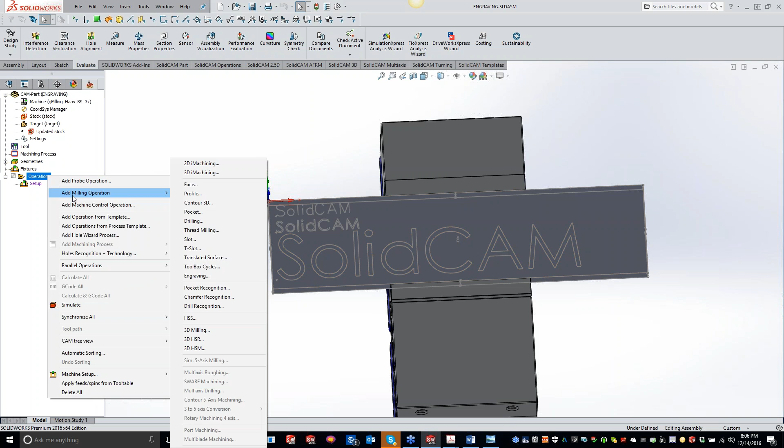We'll go to our engraving right here. Now, set up just like all of our other operations, starting with your geometry and just moving your way down.

Now, with engraving, you do have the option to do 2D and 3D. When we get into 3D, there's a lot of nice features that you guys don't have to do in SolidWorks that SolidCAM really makes easy. We'll cover that in the next part here.

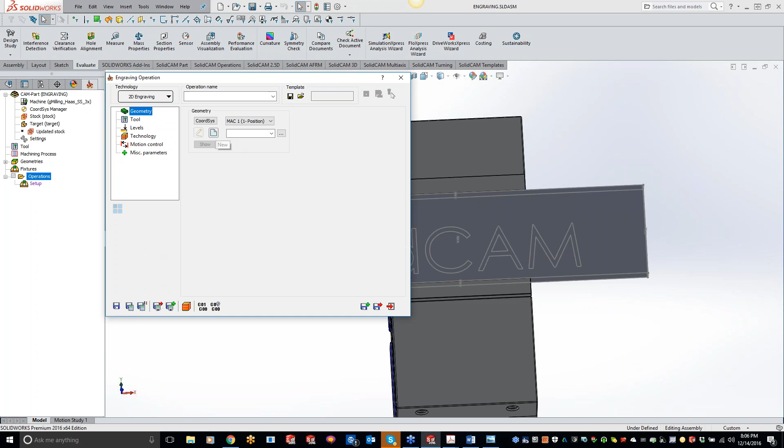So for 2D engraving, just go ahead and grab that new geometry. Now, if you guys are looking for a really nice single line font, SolidWorks has it — it's called DPS Schrift. For those of you just looking for a simple single line font like what we have up here, DPS Schrift is the font you want to go with. We can do the bold too, and I'll show that, but if you're just doing simple part numbers, you don't need to bold it or do anything fancy. That's the one you're going to want to use.

So when we go to pick our geometry, we're used to coming over here and chaining. Well, since we created all this in SolidWorks, we can just come down to your multi-chain at the bottom, click Add, click on the text icon on the left-hand side, and hover over. Right now I have a mouse cursor that looks normal. As soon as I get close to that text, see how it turns to a letter A? As soon as it gets there, just click anywhere, and it will automatically find all the chains for that font. So we can accept that, and what it's going to do is build chains.

Now, let me minimize this out of the way here. If you guys are getting chains that are a bunch of little tiny chain segments, what's happened is your spline approximation is off. So I would set your spline approximation to around 2/10, do a gap minimum of 2 thou and a gap maximum of — you don't even need 40, you can have 10 thou on there. But if that spline approximation is off, you get a bunch of little itty-bitty line segments and 500 little chains. We want one chain throughout the entire letter so it's not doing a bunch of little breakups. Just a little tip for you guys.

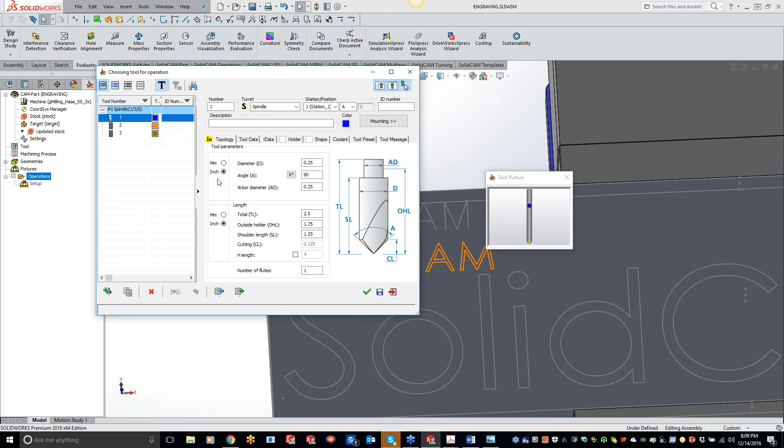Okay, so we got our geometry, we are going to grab our tool. Now you guys can use whatever tool you want — I personally like just using spot drills. Get a carbide spot drill, it'll last forever, but they do have engraving tools out there too. Costs a little bit more, but it all depends on how much engraving you're doing. For this one, I'm just going to grab a regular 1/4 inch spot drill. Let me add a holder on here.

Okay, now levels — upper level is the upper part of your part. If you guys are seeing this as mine is red and yours is green, it's just how the colors are set up in your SolidCAM settings. So if you're seeing green or red, it doesn't matter what color it is, it still means it's physically linked itself to the geometry. Now the engraving depth, we'll set this one at 10 thou.

Now technology. Like I said before in all the other night classes we do, technology is kind of where all the guts of everything are, everything that's going on.

Now when you guys are doing a single line font using your spot drill or your engraving tool, you always want to change this to center. You can have this defaulted as center if you want, but we have to save that out as a template, kind of what I was talking about in the video on how to set up a default setting in an operation. So go ahead and put that to center, and we're basically done.

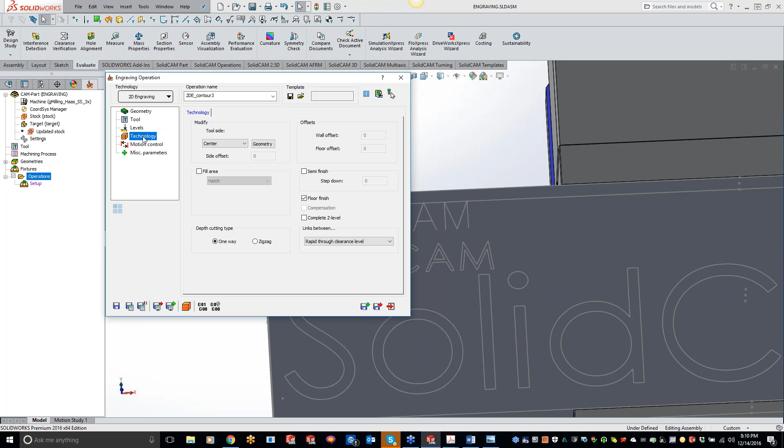You can go to your motion control and miscellaneous parameters, but 99% of the time you guys aren't going to get past the technology. So we'll just leave it on center, save and calculate, and now we have our toolpath.

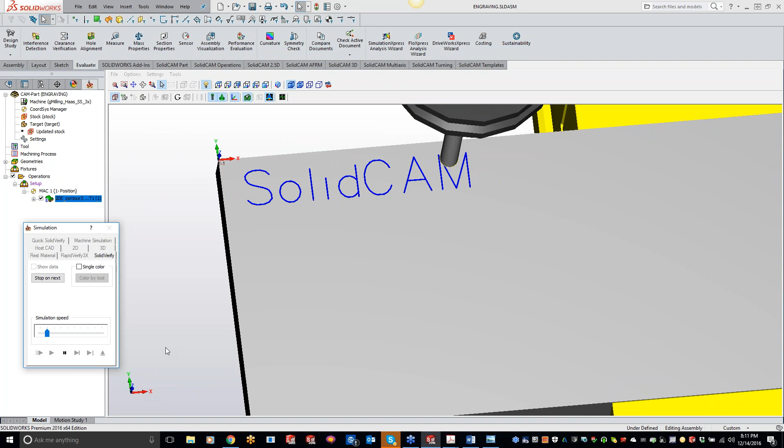So let's just do a SolidVerify, and you can kind of see what's going on here. Let me slow it down for you guys.

Just running through, cutting down 10 thou, and just following the center of that geometry. Real simple, easy to use, and this is called the DPS Schrift, and that's the best single line font I have found out there. I did some experimenting last night and tried to download some single line fonts with no luck at all.

So if you guys are not seeing DPS Schrift, let me do a sketch real quick here for you. Under your font right here, I have noticed that Windows with their updates have sometimes removed that. So if you guys do not have your DPS Schrift, let me know and I will email you that file.

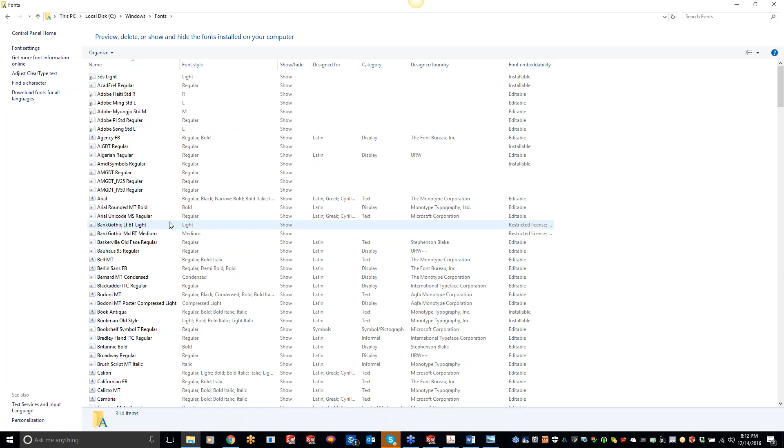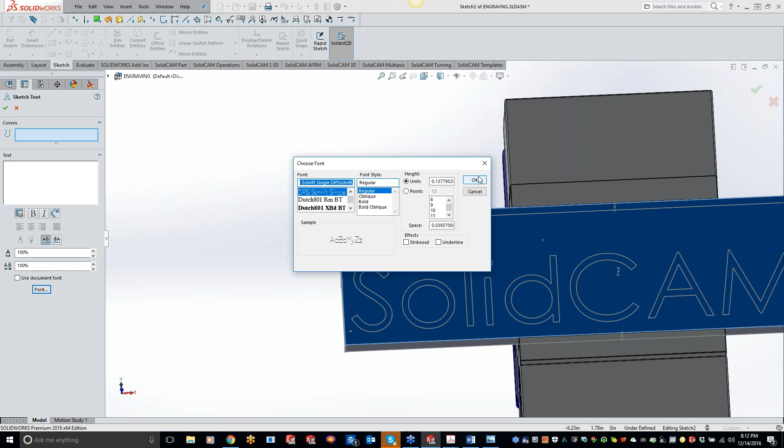Hey Kevin, can I ask you a quick question here? Absolutely. I remember, and I might be showing my age here, but back years ago when you wanted to use specific fonts for engraving, you had to go through this weird process where you had to explode the text and turn it into geometry. There were a few different steps you had to go through. You don't have to do that anymore, nope. All done automatically for you. Excellent. Okay, so you have to understand, I mean you're talking to a 40-something-year-old guy here, so just... For those of you that haven't seen us at IMTS, Brendan might be 40-some years old, but he looks like he's 25.

Okay, so now we'll get on to the bold. So I'll leave that in there. We'll just start a new add milling, engraving here, and we'll do another 2D.

Now basically we're going to pick our text the same way as we always do. Multi-chain add, click on text, and it's going to chain everything for us. Hit the green checkbox, and it's going to build all our chains for us.

And we can go ahead and grab our spot drill here. Same thing with our levels, we'll just go another 10 thou. Technology, put it on center. Save and calculate.

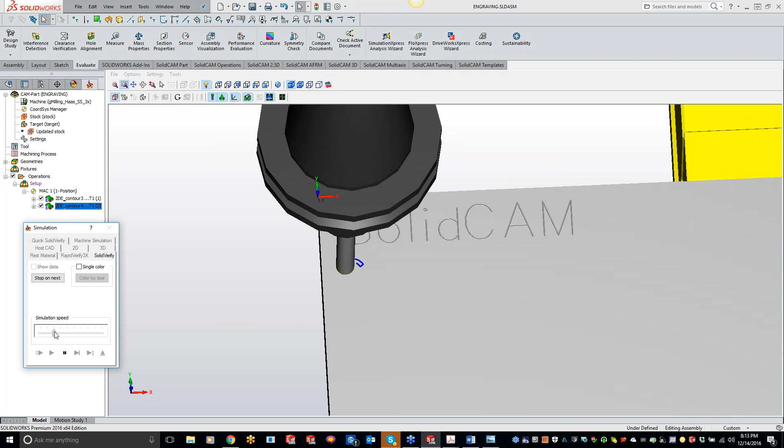And let me get zoomed in here. Play that through, and now you'll get the bold style of font, and this will work.

The SolidCAM engraving will work with the majority of SolidWorks fonts. If you get into the really crazy fonts that have letters kind of looping back on themselves, that does become a problem just because it's multiple chains there. You can go back, it will chain everything, but you might get a portion that's not chained, and you'll just have to go back and click on those.

And I'll actually show you that when we do the 4-axis engraving. So any questions on what I've shown you just on the simple single line font?

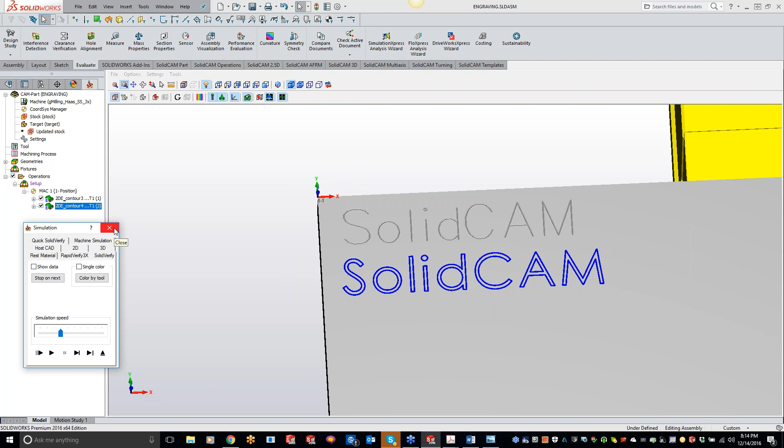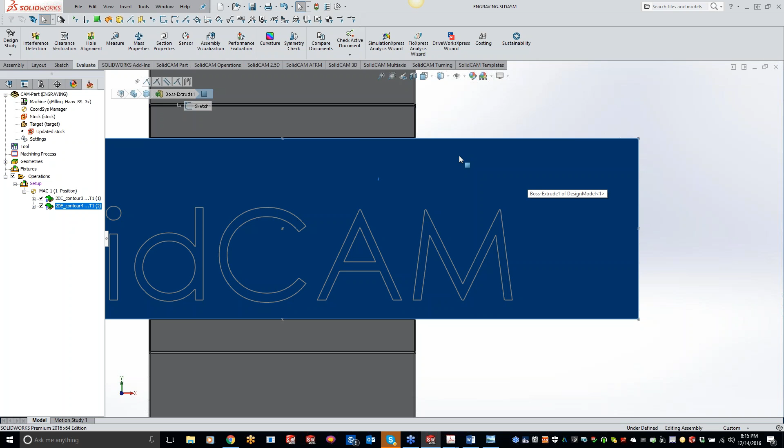Okay, so now for those of you that don't have text on there, or maybe you don't want to physically write anything on here, we'll do a normal to view here. We're going to put a text over here, maybe a part number, and you don't want to physically put that sketch on there. No problem.

So what we'll do is come in here again, add our engraving, and now for our new geometry, instead of picking the multi-chain, we have added a text button in here. This is where it comes in handy for SolidCAM users. So we'll click text and click add.

Now this gets a little confusing at first, but I'm going to walk you through step by step and make it as easy as possible. First thing you want to do is pick your reference point. Where do you want the geometry to be? I just want it somewhere over here. Hit the green checkbox, and it's going to fill out my numbers for me.

Now what I want to do is click the edit button, and it's going to bring up like a Microsoft Notepad document. First thing you want to do is click the text button and click and drag a window.

Let's just say we have a part number, 123455. Now you can come in here, you can change your font, and these are all the same fonts that you were seeing in SolidWorks. Maybe we don't want 72, maybe we just want 36. Hit OK. So there's our font. We can center it—basically, like I said, it's Microsoft Notepad. Now we hit the green checkbox.

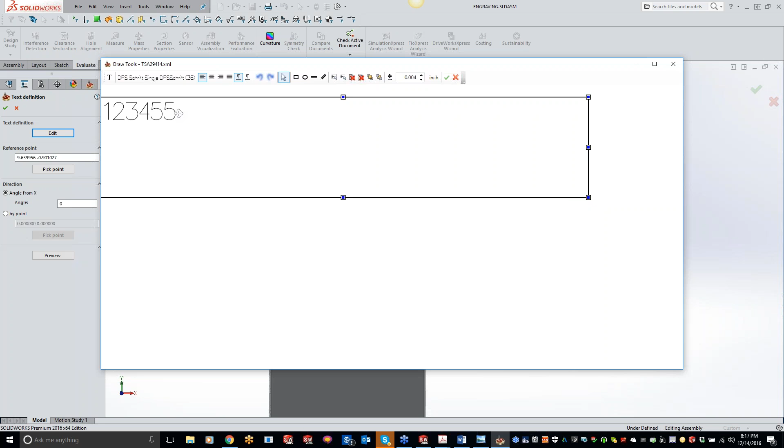So when that's done, you can verify your chain. Well, maybe I want to make my text just a little bit bigger. I can just highlight what I have here, and let's do 48. Hit OK, hit the green checkbox, and we can do a preview. My text is larger, I'm happy with that. Now I can hit the green checkbox, which builds those chains automatically for me.

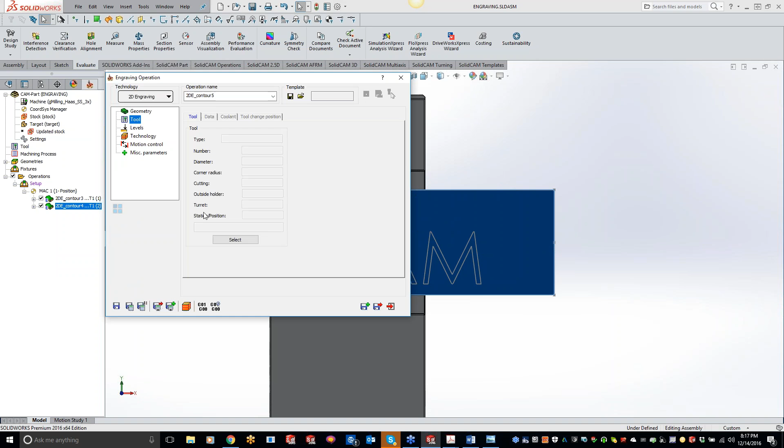And do the same thing as what we've done before. I'll just put a 10th thou in there. Technology, put it on center, save and calculate. Now you'll see you're not going to see much of a toolpath because the toolpath is actually 10th thou into the part, so the best thing to go through is just do a verification of that.

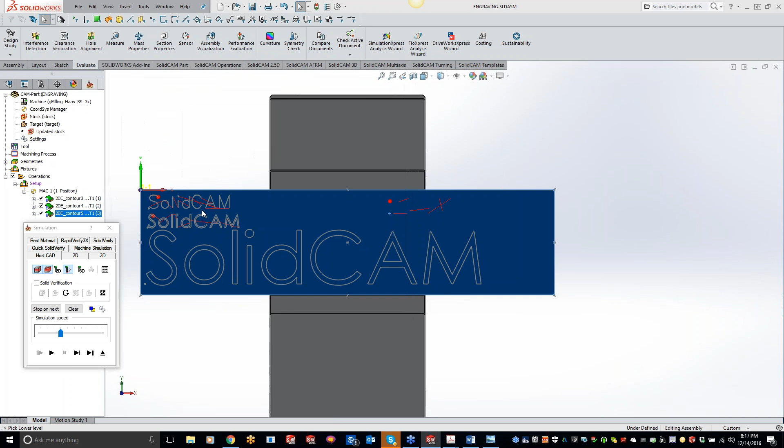And there we have our text. So I didn't have to create any sketch on my SolidWorks part. If I get out of here, you'll see that there's nothing here, so I don't have any part number or anything like that.

Now if you guys are looking for incremental part numbers, we can do this with Haas machines and some machines that run the macro program. So let's say you're running production on this part and you want every part to be sequentially numbered—part 1, part 2, and so on. If you want your engraving set up that way, there's nothing we really have to do here except set up just one engraving point. Then in the post processor, they'll add that macro in there for you guys. So that can be done, and I know it has been asked before.

Okay. Yeah, Kevin, I'm really glad you brought that up, because I know, like you were saying, on Haas machines, Fadals, they have that sub-program for serialized engraving, and that's something people ask about a lot for sure. So yeah, like Kevin said, we can just add that into the post and then call that macro every single time you want to engrave. So that's not a problem at all. And like I said, hats off to our post team, because some of the stuff that they do—definitely.

You know, some of the questions you guys asked, if we can add that in, in my head I'd say wow, I don't think that's even possible. Then 10 minutes later I get a post from Harry or Russ or Greg Shields or Greg Abbas, and they whip it out in no time at all.

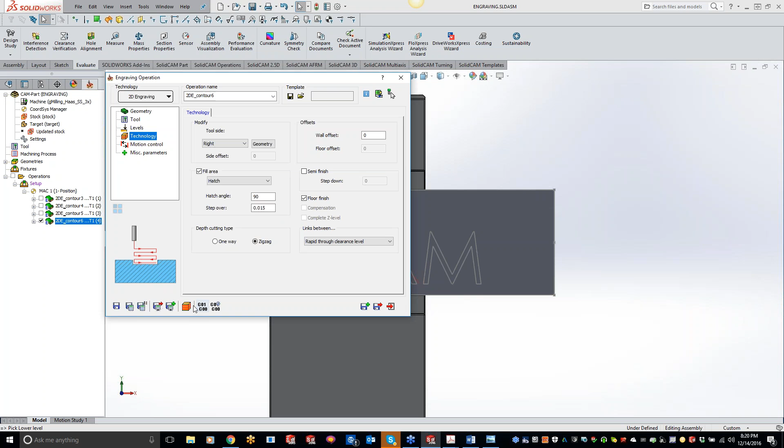Now what I'm going to do is a fill area. So I'm going to turn on my fill, and I'm going to do a hatch, with a step over of let's say 15 thou, and do it as a zigzag. So we'll do save and calculate. Now it's throwing a ton of toolpath here because we're doing little itty bitty lines going back and forth, but when it's done, it kind of looks like a laser etched engraving.

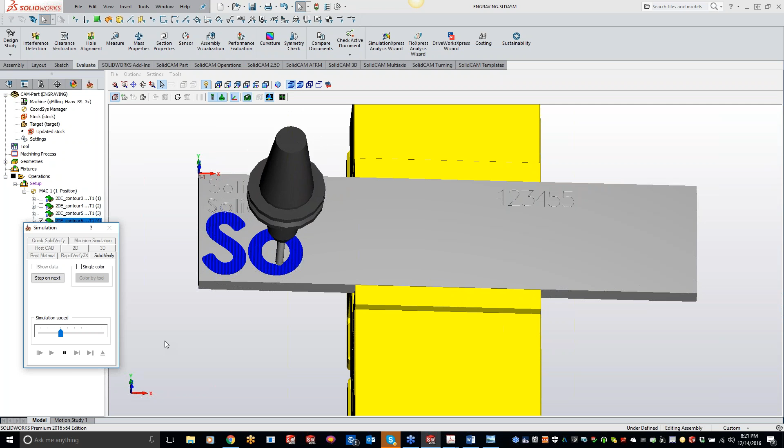So what we're doing is keeping those lines straight up and down, and you guys can take a regular end mill and fill this area in too. I'm just showing you different ways of going about this, and it really leaves a cool finish. I did it on a piece of stainless steel, and it looks great with my step over just a little. Let me zoom in for you guys here. You can kind of see the lines going straight up and down there. So throughout the entire cut, on this O right here, my lines are going straight up and down.

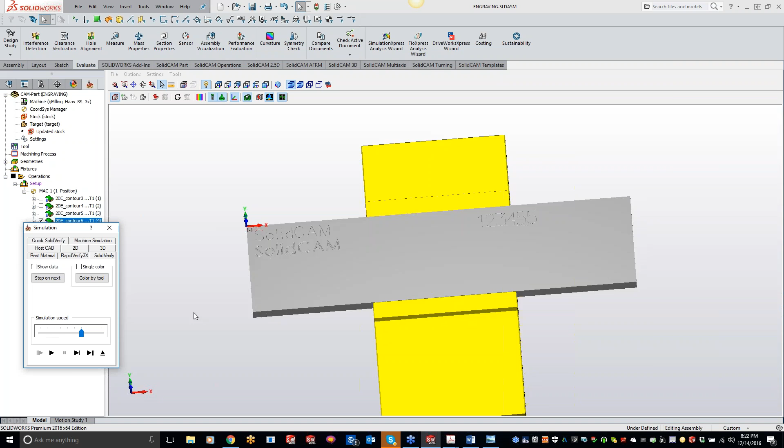You can change the angle of that too. So if I play it through here, if I want to change it to 45 degrees, it will do it at a nice 45-degree angle, and you get a really cool looking finish, especially if you're using that engraving carbide tool. Let's just do a simulate here. So if I zoom in here, you'll see it doing a nice 45-degree mark there.

Now, the nice thing too is we can also fill that area with a flat end mill. So we can use the contour style if we want to machine everything out of there using, let's see what I have for tools. Let's try that 1/8 inch cutter. And obviously with the 1/8 inch I can step much farther over. Let's do 100 thou step over. And now if we do a solid verify, it's going to look just like your standard bold letter.

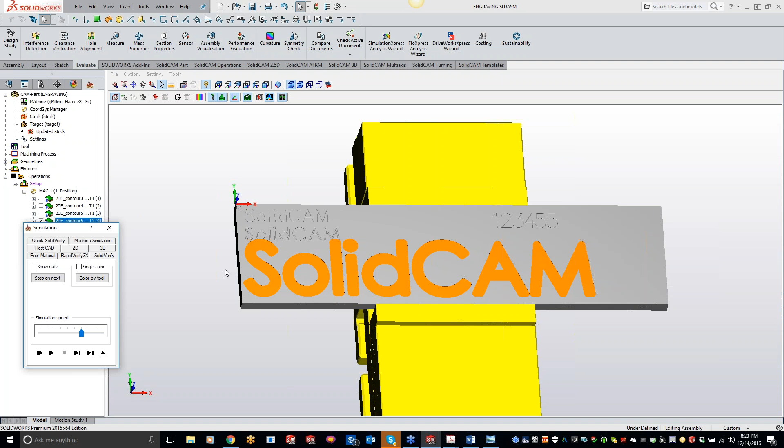So a lot of cool things you guys can do in there to make it pop, if you're looking for more of a visual effect. We're getting a lot of guys doing gun parts. That's something I kind of forgot about from one of my old jobs, and going through the class, it looks really cool as a visual feature. You guys can turn on your floor finish, or take it in multiple cuts, have your wall offset, turn your compensation on, all that good stuff.

So maybe you guys just want to do it one way. We also have middle line only. Now I'm going to switch back to my engraver there. The middle line only works okay. What it does is it basically finds the midpoint of your geometry and creates geometry off of that. So if we do a simulate here...

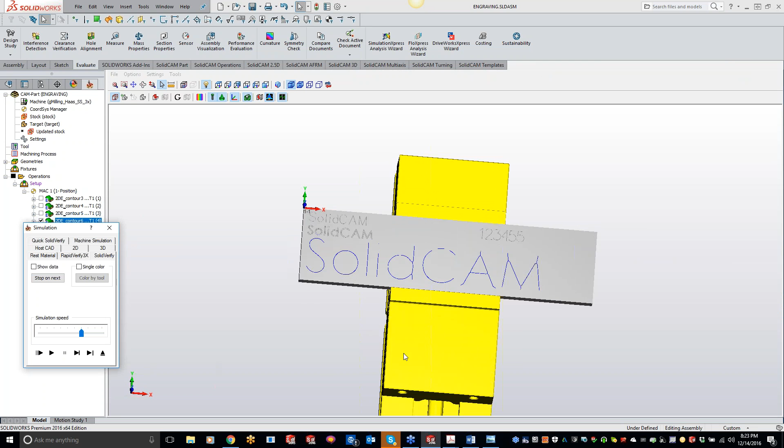You'll see we get, since the A comes up and does a sharp point and the M's come up and do a sharp point, it's trying to find the middle line of that. So it depends on what font they're using, but you do have that feature of middle line only. So there is an option there. It's not going to be perfect—if we look at this M, we have 2 points that come together, and it basically comes up to that end point. So those M's look a little funny, the A's look a little funny, but it's totally dependent on the text that you're using.

You know Kevin, there are a couple of really good questions here. Do you want to get into those now, or wait till towards the end? Yeah, absolutely, let's get into it now.

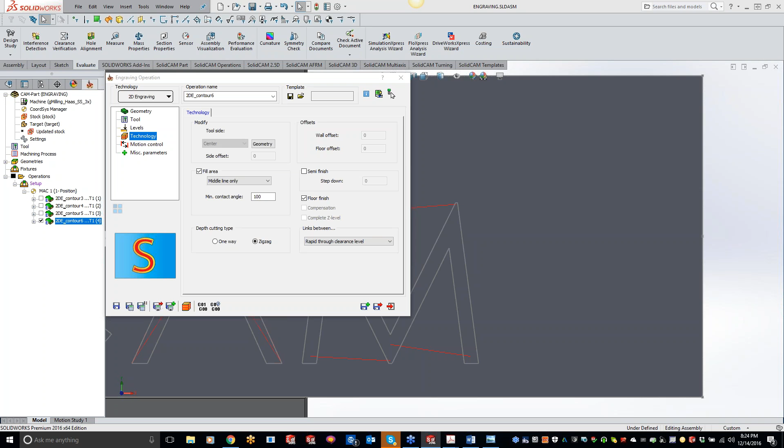So the first one is actually a really good question. When you have the text window that you're putting your font into, someone said they saw a drawing button in there. So the question is, can you draw inside the text box and have it chain that? Let's take a look. Is it this text box right here we're talking about? Let's see who wrote that question.

Jeff, yes, okay, so let's do a text. I don't know, so how can you see the line and the pencil and all that sort of stuff? Let's just try it. Why pencil? It's not like I'm able to click and drag that pencil.

Oh, you know what, let's try this. Sorry Jeff, to put you on the spot here. No, I think Jeff's putting you on the spot, Kevin. I'm using his name though. So he's saying use it outside the text box. Can you do it outside the text box? Let me just cancel this. No. Edit.

Okay, that's pretty interesting. So that's creating a spline or something like that? Yeah, so you can - good call, Jeff. I guess I didn't even realize that. So nice, what Jeff is - if you need a job, give us a call.

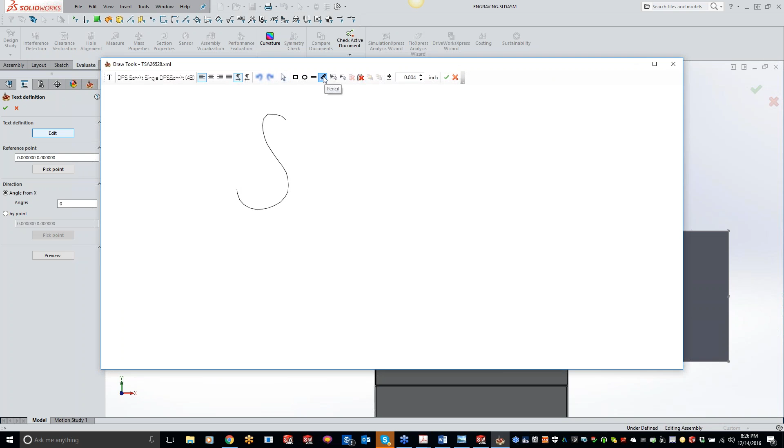So if we want to do a little circle around it, hit the green check box. I have to correct myself, Kevin - that was George Lauer from Johnson who said to draw outside the box. So George, gold star for George.

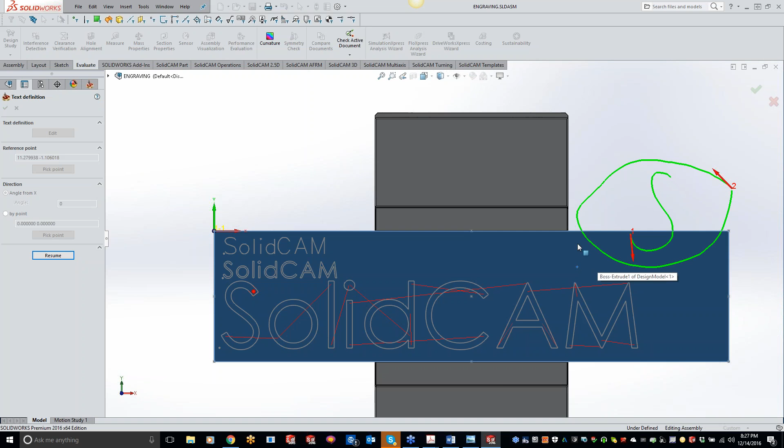So you guys can grab that chain, and obviously we won't have it in the 0,0 spot. So if we put it down here, now if we do a preview, we'd have to make it smaller. But yeah, if there's something you guys want to draw, that kind of brings up a good point here.

If we're able to do that, we might actually be able to import in pictures, and that's something I'll have to look into, because 99% of the time I don't use this feature - I just kind of go along with what SolidWorks has. But I would assume we could insert a picture in here too, and you guys could convert that picture into geometry too. I'll have to look into that for you guys.

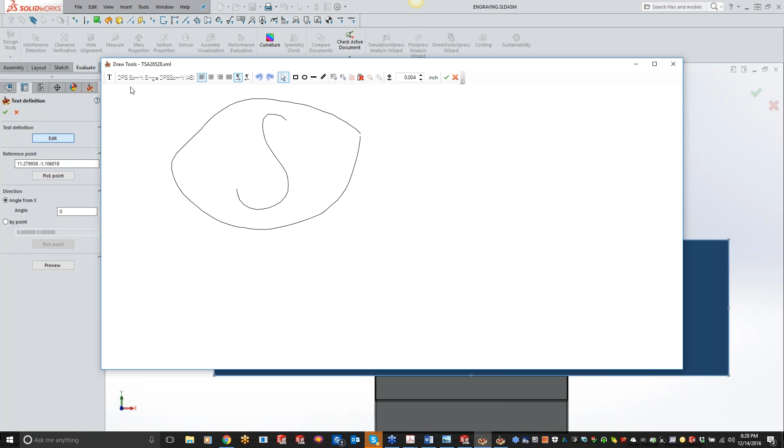And what I'll do is post an updated video on YouTube. It won't be an hour-long video, but kind of going through if we can do pictures and different ways of using the drawing tools inside the text icon there.

Okay, and Kevin, the other question right after that was: when you're doing the cross-hatching inside the lettering, will that cross-hatching fill in any shape as long as it's a closed contour or a closed shape? Correct. Yep, absolutely - if we do fill area, hatch, or contour, it will fill it in, kind of like what it's showing right here, a bold letter. As long as it's a closed loop all the way around, it will grab that.

Perfect. And like I said - go ahead. No, I was just saying the sky's the limit on how you guys want things to look. So if you want to use just a fill and keep it as a hatch, or if you just want to machine it out, there's a couple different samples there of what you can do to make it look very nice for you guys.

Okay, and I'm not sure if I'm reading this question correctly. It looks like it says I need to select geometry that is part of a parasolid that I brought into SolidWorks. I'm assuming he's asking, can he select geometry that is part of a parasolid that was imported into SolidWorks? Would that work? Yeah, absolutely. So let's see.

Let's just do hatch, and we'll set that back to... which is kind of a lead into our next question.

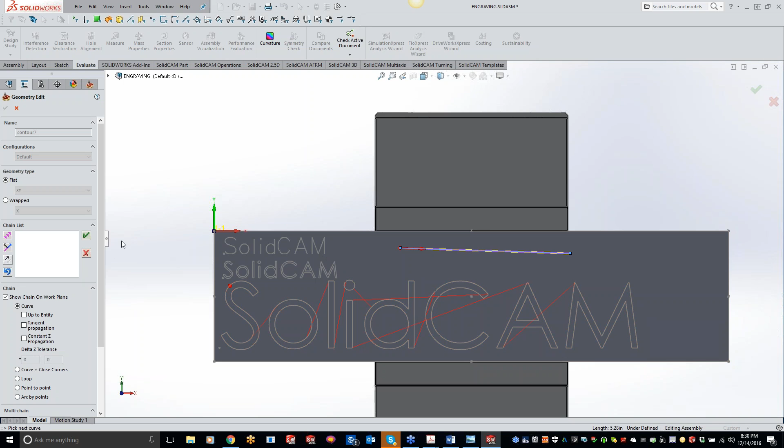You can either click on it and be done, or for that particular fellow we had, he was making a nice 6-inch aluminum ruler for a fixture he was doing. What we did for that is, let me cancel that geometry.

We came down to the multi-chain, and he had tons and tons of little hash marks in here. What we did is we just left it on edges and clicked on the face, and it's going to find all the edges for us. So right now we just have one outside edge going all the way around.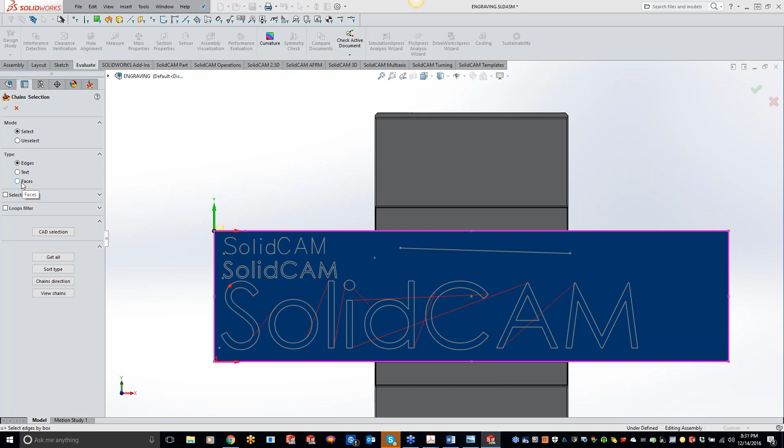But if we had hash marks, technically we should have picked up that hash line too. Let me... edges, because this is how we actually have to do it inside of the fourth axis, your faces. It's just grabbing that outside.

It does work with the hash lines, or parasolid geometry, or worst case scenario, you guys just have to click on here, do a manual chain, hit the green check mark. I'm gonna get rid of that outside chain here, and save and calculate, do a simulate here.

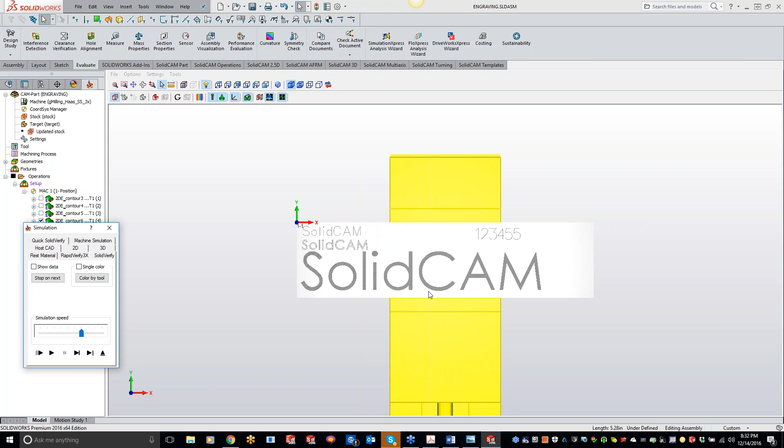And now we have our... I didn't set a depth there. Save and calculate now.

Contour path is empty. Okay, so what we want to do is center and get rid of your fill. There we go. So now if I do a simulate, you'll see we get our nice hash mark through there.

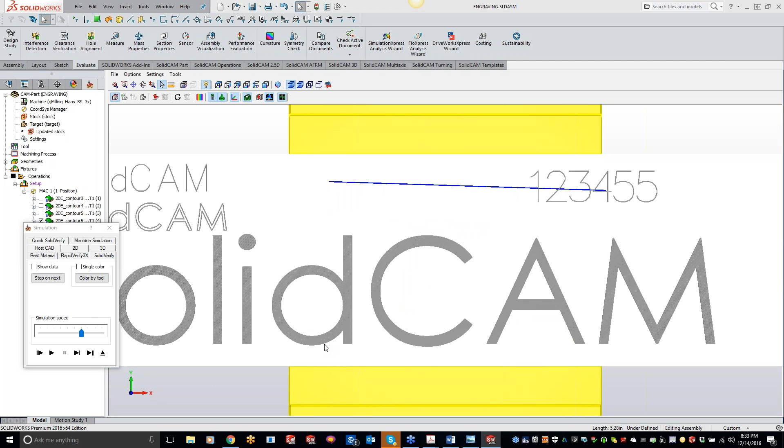So it doesn't just have to be text, Sean, and Nick too, you can copy and paste stuff too as text. So absolutely bring that in there.

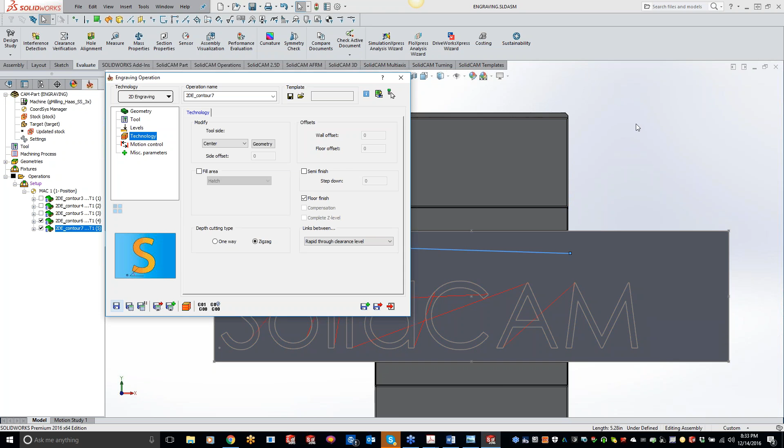Yeah, all the functionality that you guys can do in basically Microsoft Word or Notepad, you guys can copy and paste that stuff in there too. So if there's something you want in there, copy and paste it from another part program or something like that, definitely we can do that.

Now let me just try something real quick here. If I go to my geometry, and let's do a text right here, and we're going to edit, and let me just try copying something from my other screen here.

Yep, so you can copy and paste stuff in that's actually copied over from a Microsoft Word document. So for those of you guys asking about copy and pasting, just use Control-V and Control-C. Control-C does the copy on your original document, and when you want to paste it in, you hit Control-V. So you can do it that way, and it will grab that text for you.

Any other questions so far? Not so far, Kevin, I think we're moving right along.

Perfect. All right, so now let's see what we've done so far. And let's do machine sim.

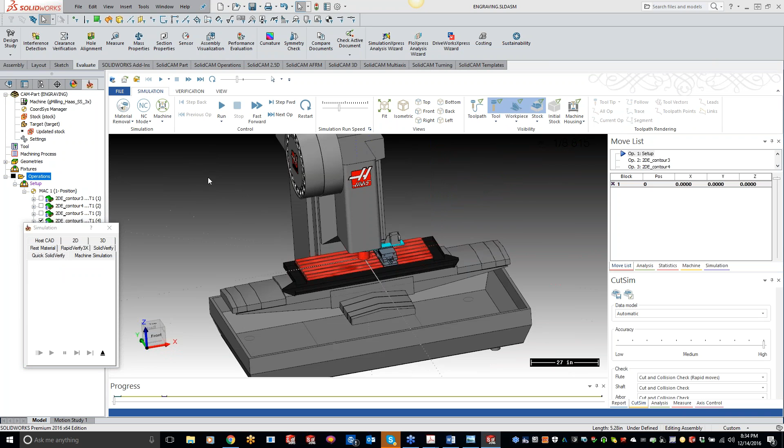Are you guys getting sick of me showing stuff on machine sim? Never, are you kidding me? I just love it so much. Machine sim is fun. Exactly.

Okay, we'll speed her up just a little bit here. So now you can see we're doing more with the bold letters here, and now we're doing the back and forth, doing that really cool looking pattern.

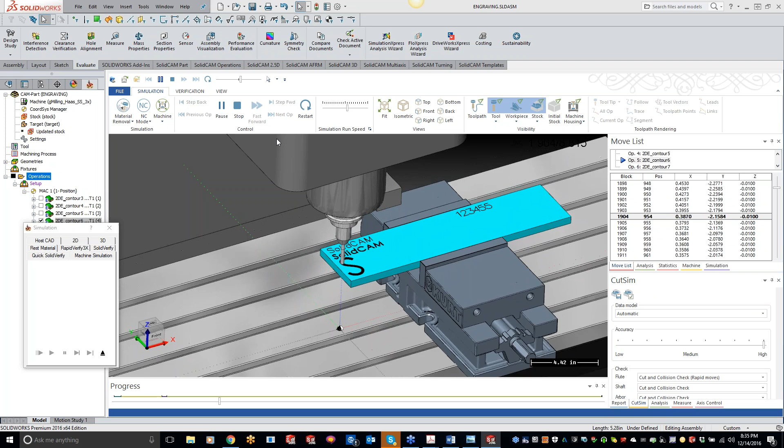Well, thanks guys, I'm glad you guys like the machine sim too. Sorry, Brendan, you really don't count. I know, I just work here. Okay, we'll speed her up a little bit here.

Oh, I have my resolution turned up to max. Let me... I'm hearing my computer just wind up. That's why.

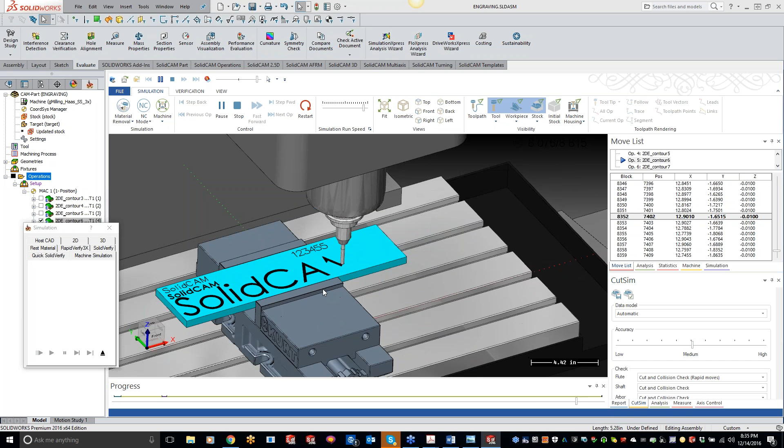And there's our hash mark, so there's our done part. We can see it in the machine. The only thing we didn't have on here was probing. We could probe up our part and measure where our home position is. But that about covers the 2D.

So now, if we don't have any other questions with the 2D, I'm going to close out of here and we're going to get on to the 3D.

There's some really super cool stuff that Kevin's about to show you here. And the really cool part about this too, for people who may or may not be aware, depending on which package you've selected, you can do a lot of this stuff in our lower level packages as well. You don't have to have a full 3, 4, or 5 axis package to do what Kevin's about to show you here. This might be enlightening for certain people here in the group.

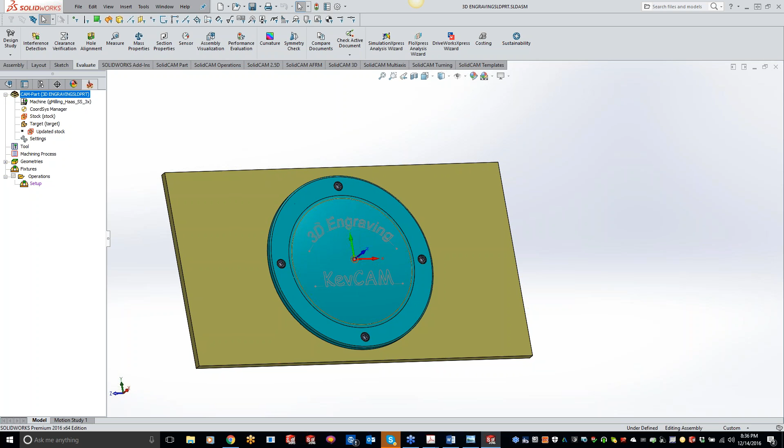For those of you that are pretty good with SolidWorks, you can do the projection of the text onto a 3D surface. But let me get kind of a side view. So we have like a dome top right here. But what I did is I created this sketch.

Let me get this sideways here, so you guys can see my sketch is just on a single flat plane. Now this plane can be 5 inches up in La La Land, doesn't matter. Are you guys able to see what I'm talking about here? We have a nice half moon surface right here, and the text is actually flat.

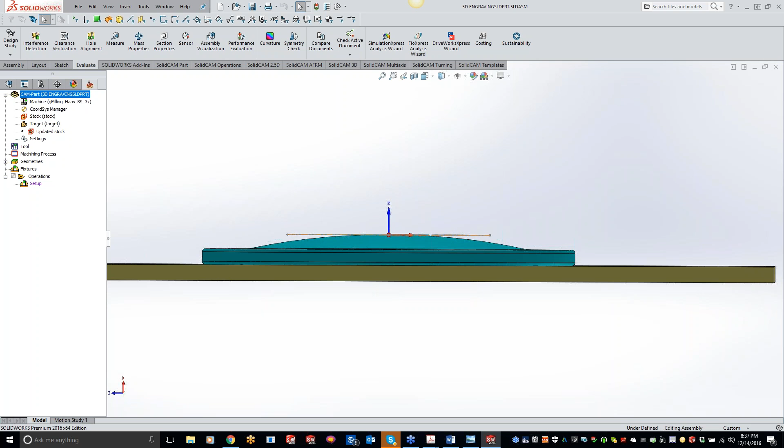Okay, perfect. Thanks, Clarence. So now what 3D engraving does is it projects that text onto the 3D surface for you guys, taking out a lot of the hard work. We can come in SolidWorks and project it on there. Actually, if you're using SolidWorks 2016, you can't project this engraving onto this shape. I tried it many times, but in SolidWorks 2017, they've added a new feature where you can.

Kind of neat, but you still have to go through multiple steps. So right here, all I did is I had my part, and I just added my sketch on the top plane right here. So what we'll do is our add engraving.

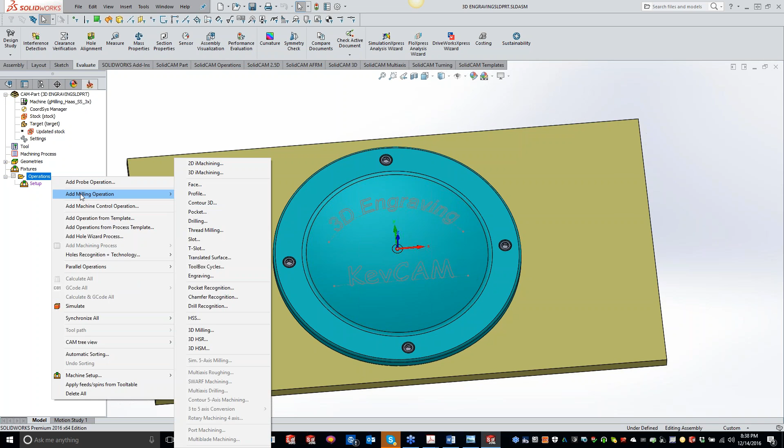Now what I'm going to do is switch it over to 3D engraving. The only thing that's different between 2D and 3D is now I have my engraving and my geometry. So if I click the new box right here, it's looking for the 3D model - what 3D area do you want it to engrave onto. I'm just going to grab my model.

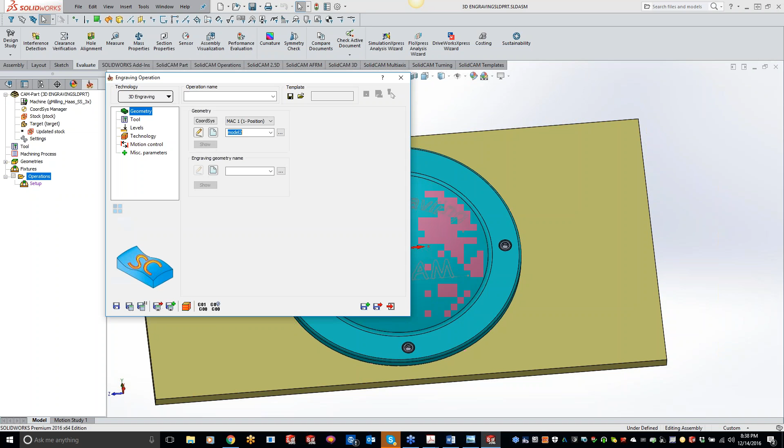And now I need to grab the geometry, so we can do like we've done before, our multi-chain. We'll do our text, click on our 3D engraving, click on our KevCAM.

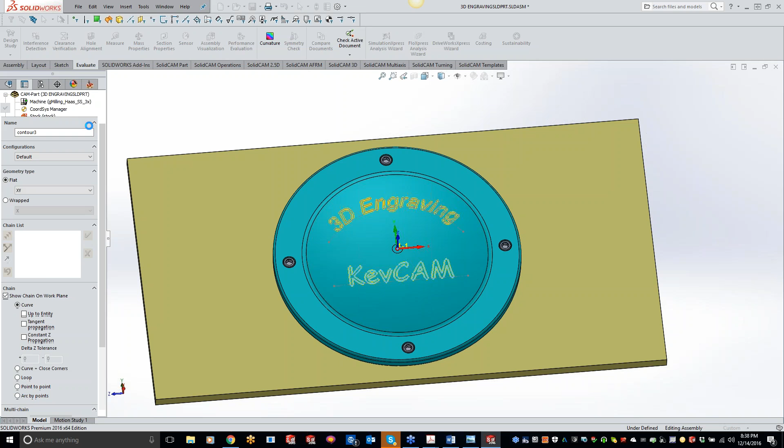It's going to produce all of our chains for us. Hit the green checkbox. Now, same as before, grab our tool.

Levels - now, I really don't care about the lower level at all, it's automatically going to find that. The only thing I'm really concerned about is how deep I want to engrave into that part. So I want to stay, let's just say 10 thou right now - I want to go down that far. Now that's going to obviously vary depending on depth, because my part up towards the top is going to vary in depth versus going down farther into the half moon shape there.

So now we can go to technology here, set it to center. Kevin, in other words, that's a 10 thousandths depth of cut tangent to the surface point, correct? Yep, absolutely.

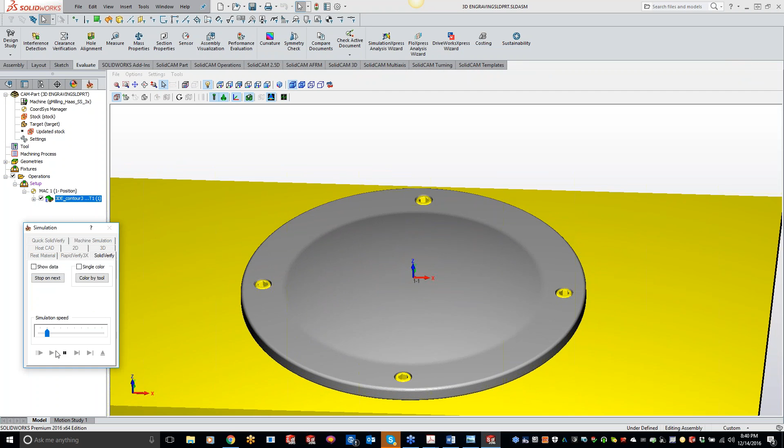Now we can do our save and calculate, and let's do a simulate here. And so now we can see our nice half moon - I got my bolts in there on a fixture plate. Let me slow it down a little bit right here - I guess we can speed it up. And now the tool is actually going up and down as it goes for the geometry.

You guys can do this with the hatch, you can do this with the fill, whatever you're looking for. It's a real nice feature because it's taking just 2D geometry and basically projecting it onto a 3D surface for you, doing all the calculations.

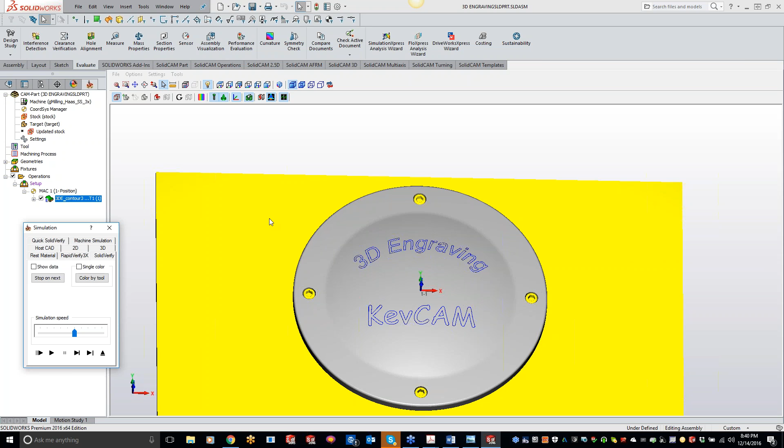You'll see right here I got a different 3D bold text, some funky bold font going on right here. So it's real nice. Let's just simulate here, let's do machine sim.

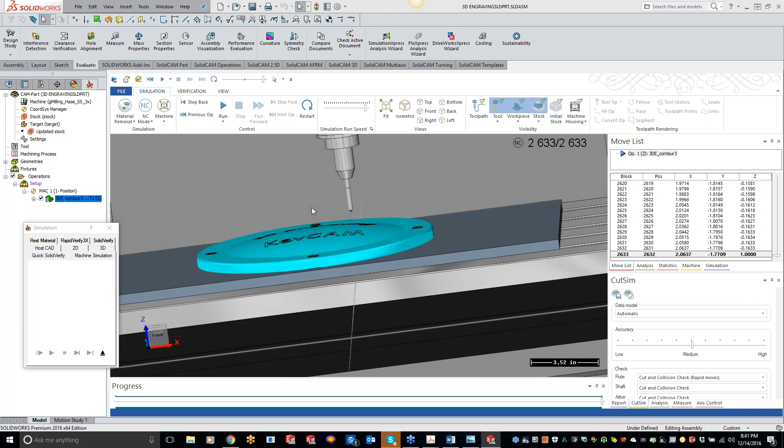So we got our fixture plate bolted onto our machine here. And there we go, nice programming. Like I said, it's compensating for that Z. So if I zoom in here, you can see that no matter where I take a depth mic along this profile, it's going to be 10 thou deep all along this entire surface. Really kind of a nice feature. We can do it in SolidWorks too, but there are several steps you have to go through, so this makes it a lot easier for you guys to use.

Kevin, does that surface have to be essentially like a common surface, or can it be a free-form surface? In other words, if you had a ripple or something like that, could you do that as well? Let's do a ripple here.

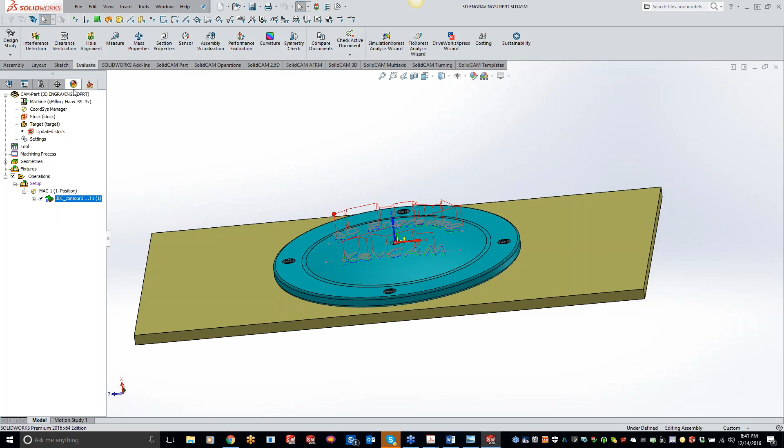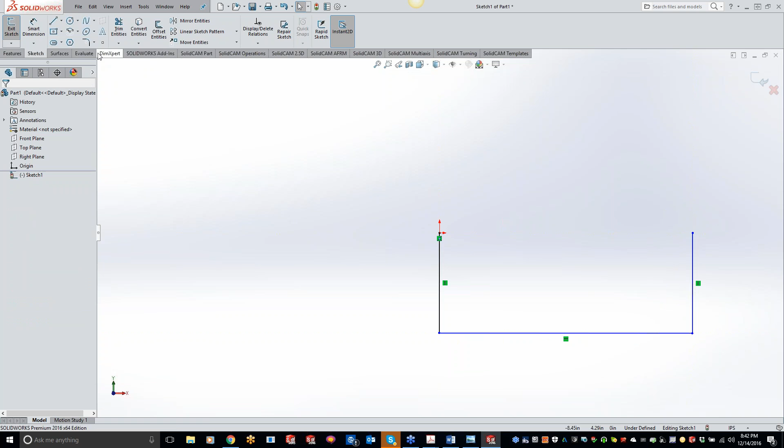Let me close this, and we'll just do a new part real quick. I'll try to make this as quick as possible for you guys here. Do a sketch, let's do a spline here. Okay, so let's do features, extrude, and let's bring this guy out here. I'll just do a save.

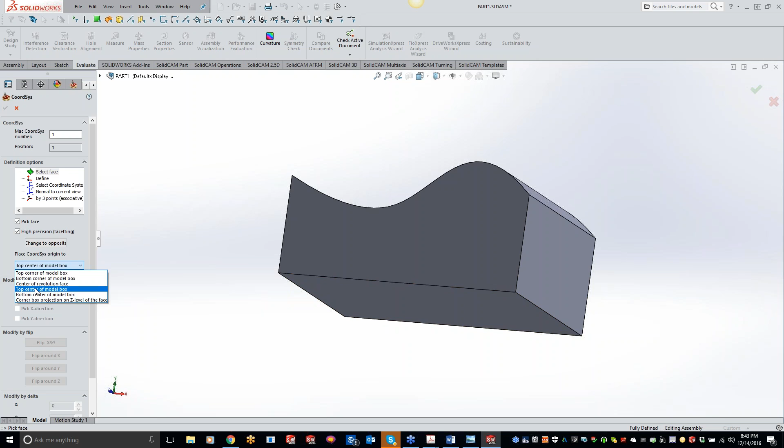Yep, that's exactly what we're thinking about. One of the other questions we'll see as you do your toolpath here, Kevin - there was a question as to whether that depth is 10 thousandths depth throughout, and yes, it is. It'll be a constant 10 thousandths depth, because it's maintaining that 10 thousandths step down or Z depth into the surface, because it's always remaining tangent to that surface, to the plane of the surface. So it's always going to maintain that depth. Absolutely.

Okay, so we got that set. We'll do a stock real quick, and we'll just do a 3D model. Grab our 3D model there. All right, so now we got our part with the wave on there. So what I want to do here is get this expanded out a little bit here.

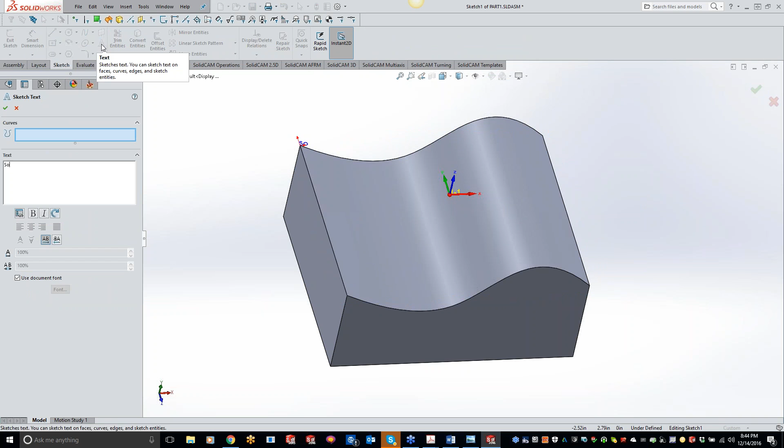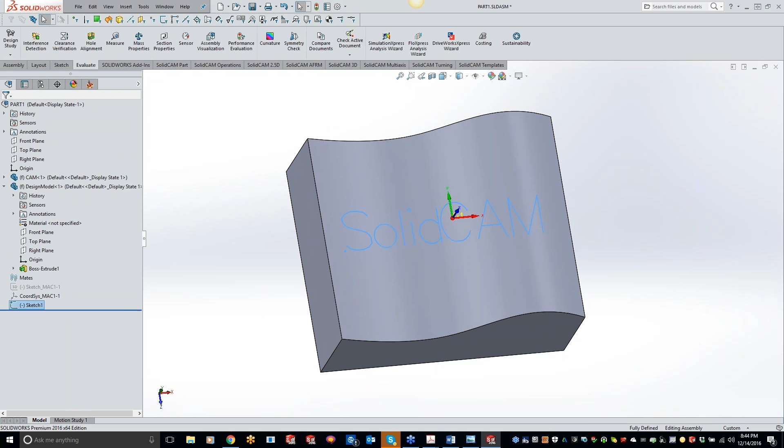Add operation, engraving, do our 3D engraving, click on the model, grab our text here, and we'll just grab a spot drill. Well, let's just grab engraver. Checkbox, levels, and we'll just do center, save and calculate, solid verify.

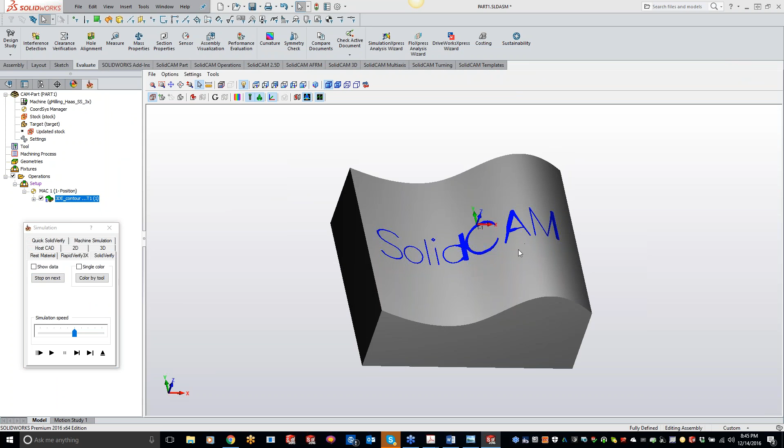Okay, so what's going on here is my tool is actually very blunt. So let me just change my tool here to - let's see, I need angles, 8. You know, Kevin, as you're doing that, that brings up a really good point.

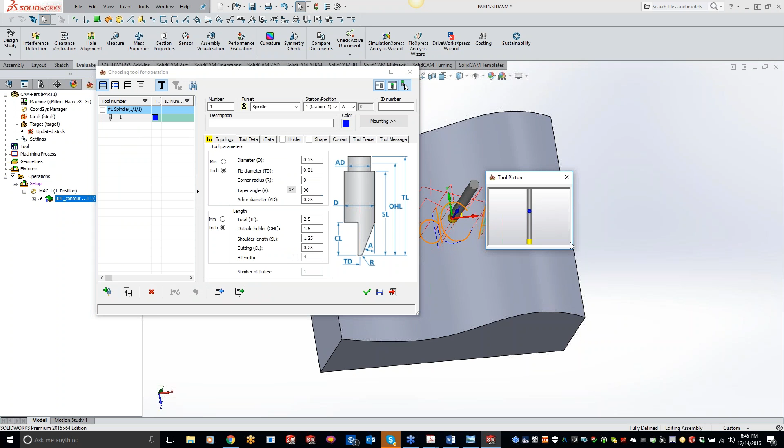You always have to keep in mind that the greater the angle of that surface, the more risk you take of basically running into the side of that cutter. Yep, so this is a really good example of why you have to be aware, because this isn't a 5-axis toolpath, this is a 3-axis toolpath. So that Z is always remaining vertical. So again, you do run the risk of slamming the edge of the cutter into the surface based upon its geometry.

Absolutely. So you'll see right now I have a much pointier tool in here, and now when that tool gets over to the edge right there, I don't have to worry about basically shanking out, what's going on. So hopefully that answers the question. Any other questions with the 3D milling?

No, that definitely covered it, Kevin.

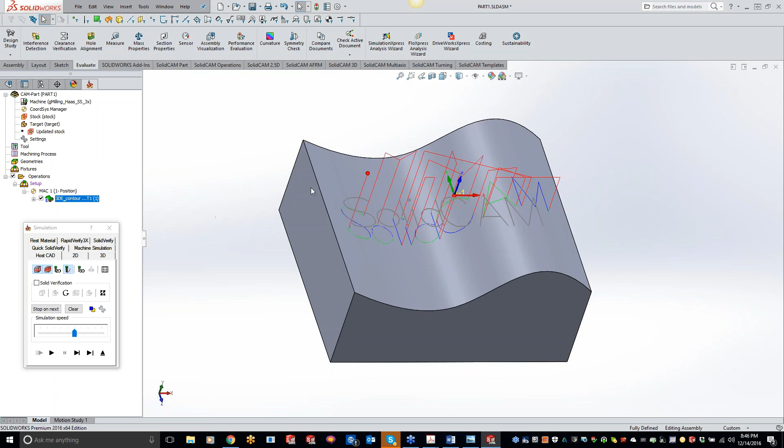Now I like to show you guys the machine sim. You'll see that I just created this part completely on the fly, nothing behind the scenes done before you guys got set up. The nice thing is if you have machine sim, all you have to do is come into machine sim, and it bases it off of where your coordinate system is located. So from the top of our part, let's just see how tall our part is. Looks like 1.8. So all I have to do is tell it how tall my part is, 1.8, hit OK, and now we can do a machine sim.

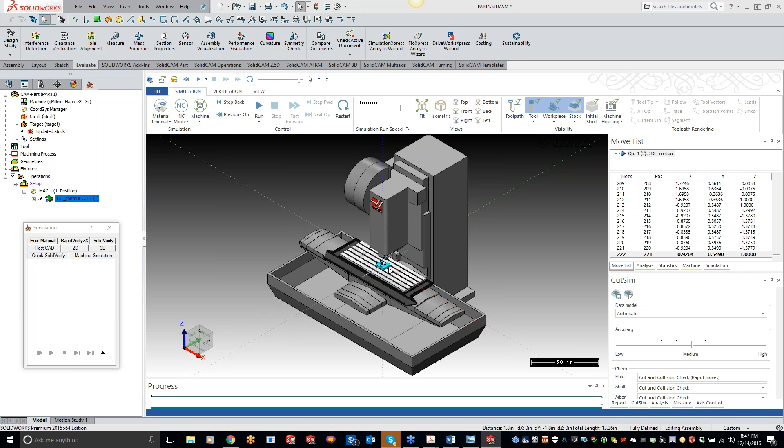With that part, you'll see I don't have a vise or anything on there, but that's just to show you guys how easy it is to set up when you have machine sim. Quick, simple, easy, and like I said, I created this part 100% on the fly for you guys. Looks like I got the wrong measurement—I have my part sitting inside the table a little bit here, but we can bump that up in the Z. Really easy to do.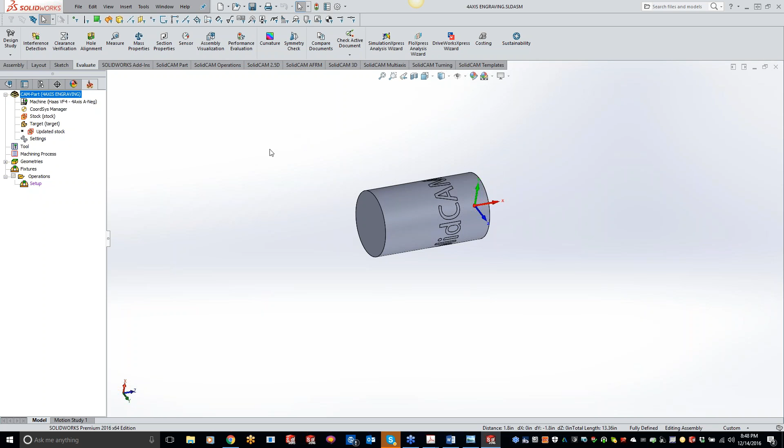So, okay, let's get on to something even cooler now. And you mean there's something cooler than that? How can that be possible? Love it when we have to do on-the-fly stuff. I was going to say, was that too cheesy of a line there, Kevin? Okay, but wait, there's more. Yeah, there you go. That just reminds me of the Shazam commercial. Or those... ShamWow. ShamWow, there you go.

Okay, so we have a SolidCAM engraved etching on a complete 4-axis. What you guys can do is this with the tool staying 90 degrees, straight up and down with your Z-axis, but when you get around these sharp corners, you're not going to be able to engrave all the way around using the 3D. So what we're going to do here is a 4-axis, and it's just as easy.

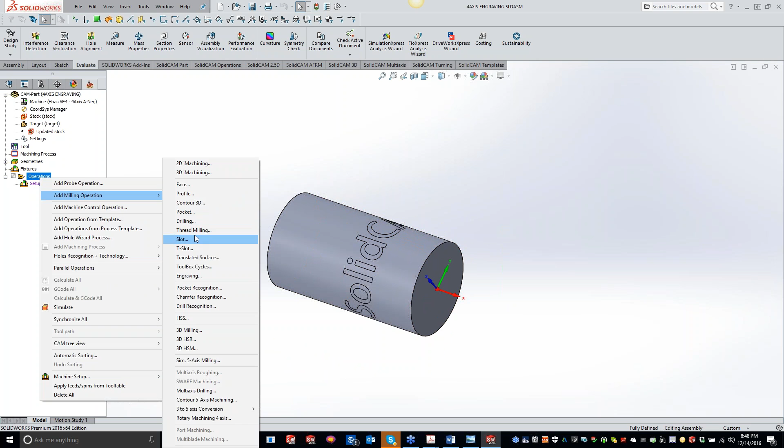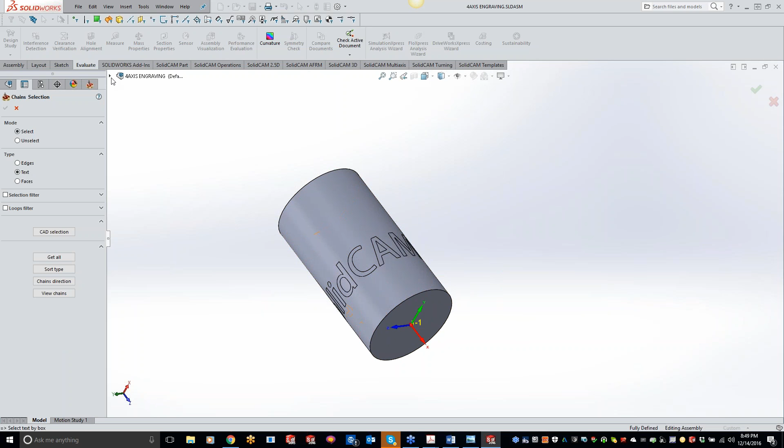So we'll do our engraving here, do our geometry. Now the only thing you need to do before you go any further is wrap your geometry. Depending on how your 4th axis is set up, the way I have mine, I want to wrap it around the x-axis right here. Now I need to grab my geometry, so I'm going to do my multi-chain. Now if I do text, let me pan it out here—it's going to want to grab that geometry that's flat. So I can't use text on this particular one right here, like I was telling you guys before, on the edges.

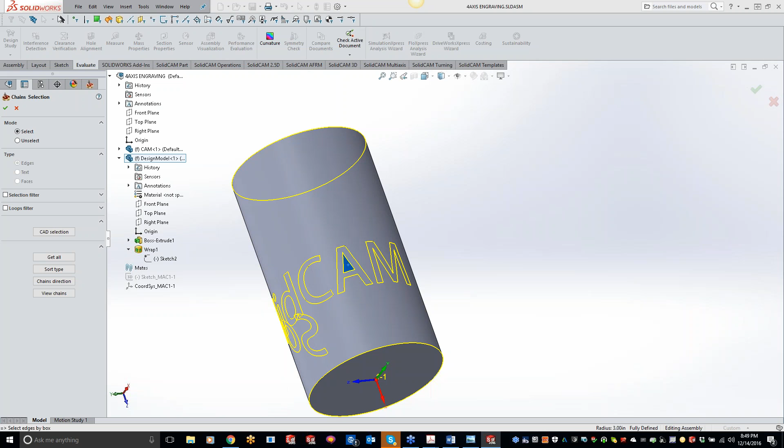So if I just click on there, it's going to find all my edges, the outer perimeter edges. But you'll see my O didn't get hit, so I'm going to grab my O, my D, and my A, and you'll see it throws those yellow chains around there. It will also throw yellow chains around here and here, but as soon as I accept that, it's going to build those chains. Now I can just come in here and delete chain 14, delete chain 1, hit the green checkbox, and now we're good to go.

And we're going to stay on 2D, and we'll grab our little engraver here, engraving depth of 10 thou. Technology, we'll put it at center. Save and calculate. And let's do machine sim so you guys can kind of see what it looks like with the 4th axis on there.

Now let's slow it down a little bit for you guys. You'll see our indexer is actually rotating around, so it's staying right up on that top surface, keeping that constant 10 thou all the way throughout the entire cut on a round cylinder.

I personally think it's kind of cool. No, this is very cool, Kevin.

As impressive as this looks, even just with the engraving here, the 4-axis wrapping or the wrapping feature in the 2.5 axis Pro doesn't necessarily just apply to engraving.

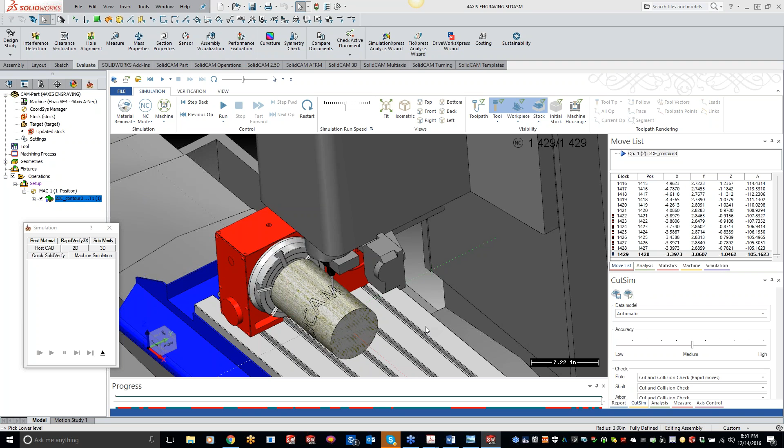Some people think if you're just running a 3-axis machine, or a 4-axis machine, you don't need machine sim, that you only need it for 5-axis. I like to say the difference is, for me to see this indexer rotating around, I can see my tool if I'm going to collide with anything on my indexer.

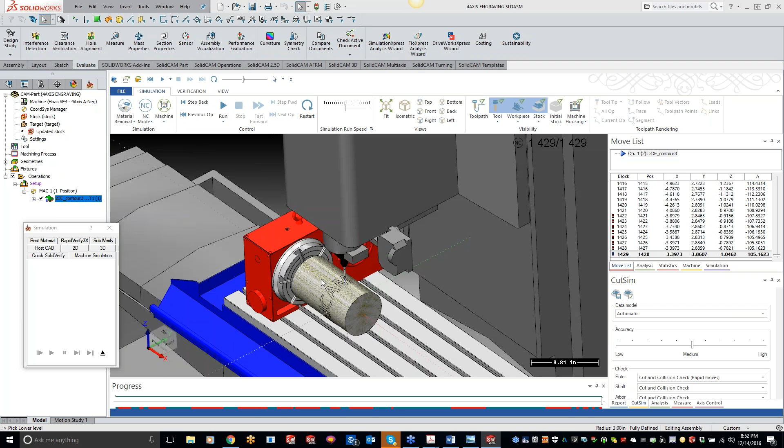It's all right there for you guys. So if that's something you don't have, please let me know and we can get you hooked up with that too. Any questions?

Go ahead, Kevin. Does it have to be a cylinder, or can it be a prismatic part? I think I already know the answer, but please feel free. Yeah, no, it can be prismatic. It doesn't matter.

Especially with your 4th axis, because on a prismatic part it's going to be on a flat surface. So like I said, sky's the limit on what you guys can do there, and we can definitely do that on that prismatic part.

So it doesn't have to be on a cylinder. I just wanted to show it on a cylinder for you guys, kind of wrapping the geometry around. Cool, so if you had like a hexagon, would it still do it on something like that? Yep, absolutely.

Oh wow, hey, I just learned something new myself. That's great. Very cool. Square stock or whatever, and the square stock, when you're doing it, it gets around those sharp corners.

Or if you have some 1018 square tube stock, it does have a little radius on the corners, and it might look a little funny going around the corner, but it will still come out keeping that constant depth, that 10 thou we told it in the levels right here of your engraving depth.

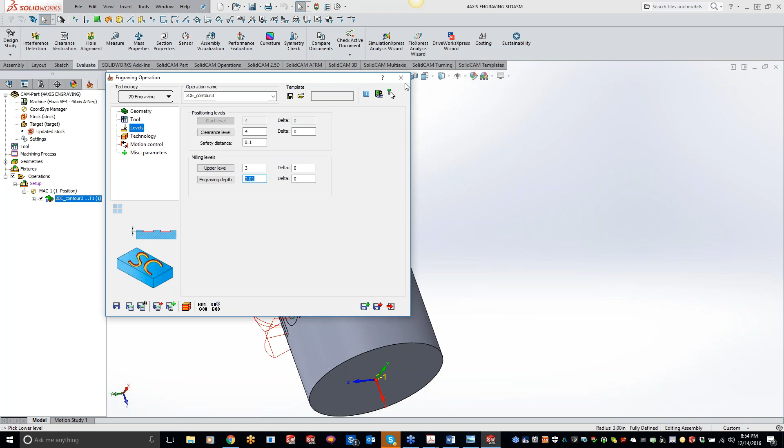Well, if it's prismatic, what it's going to do is come over here. So it is going to move in its Y — let me get my direction right — it is going to move in the Y positive, Y negative.

But when it gets around to the edge, it's going to basically keep that tool on point, of X, Y, Z, or X, Y, or Y, X center, as it's rotating around the A-axis.

When it gets to the other flat, as it goes around that bend, then it's going to keep moving in the Y axis also. Oh, okay, all right.

So it's going to know when the A-axis rotates to where that stock is flat, so then it can move in any axes. Absolutely. And then it's going to rotate accordingly. Okay, yeah, that makes a lot of sense.

And I love the comment there — that's even better than MasterCAM. Love it. Yeah, well Nick, we might have to get your quote on our website somewhere, and we'd be happy to do that.

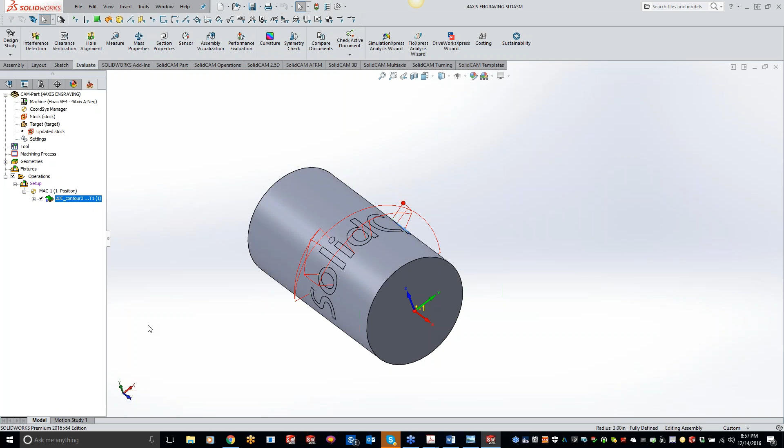If I'm gathering what you're saying there, that's pretty much the same as, let me see here. Let's go to engraving here. So if we're using a centerline, I'm thinking that's kind of what we're doing right here with that hatch pattern, and I could be totally wrong, so I'm just kind of guessing. With the 45 degrees and my step over, you can do that on a 3D surface also, usually mostly in woodworking using a 90 or 60 degree bit.

I'm not sure, George. You would have to definitely shoot me an example, and we could do that also and show you how to do it. I'm just not sure what you're trying to achieve there.

Sorry, it's a little tough with the GoToMeeting. No, actually I'm just sending George a message right now just to tell him we can touch base on it tomorrow. George, I can either give you a call and we can get Kevin on the line to discuss that. No problem at all.

I just want to make sure everybody understands that absolutely none of these questions will go unanswered, whether we can do them live right now or whether we can do them offline. We will answer every single one of your questions, so no problem there.

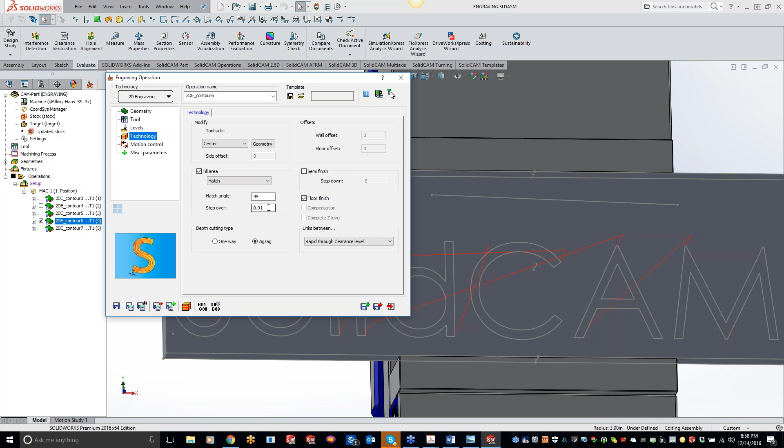And Ronnie, I know you asked me a question on shortcut keys within the verification. I'm still waiting to hear back from Sydney on if he has any more for us, but currently, as far as I know, the space bar is the only one I can tell you right now.

Any other questions, guys? And like I said, Ronnie, you're not getting forgotten, I'm just waiting to still hear back from Sydney.